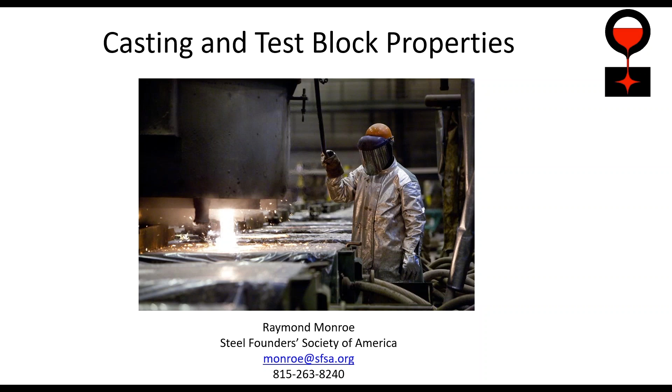Real materials have different properties in different locations, depending on their processing and on physics and everything else. So the real challenge is knowing enough about the materials and the manufacturing process to have confidence that the design you use and the material you use has the properties that you need, where you need them, when you need them. So to start out, I should clarify that we're unusual in North America because we actually require a tensile test from virtually every heat of steel.

If you order using ASTM material requirements for steel, then we're required to do a tensile test with every heat that we make. And for some reason, we've evolved now where people believe that I'm doing that tensile test to guarantee to you that you have those tensile properties everywhere in the casting. And that's fundamentally a misconception. The reason we do a tensile test is because in 1920 or 1930, every steel maker, including steel foundries, had a laboratory like the picture you see.

And to do a chemical analysis required that guy with the glasses to individually analyze each element using titration, using wet chemical methods. And in fact, he would do that for all of the required elements. And so I might not know for a week what the chemical composition of my heat was. In fact, we had melting people who were really clever, and they could tell from grinding a piece of steel and seeing the sparks that shot out of it about what carbon content it had. And we could identify how hard the steel was by using different files and different metals to see which one scratched the steel, because we just didn't have all the analytical tools that we have now.

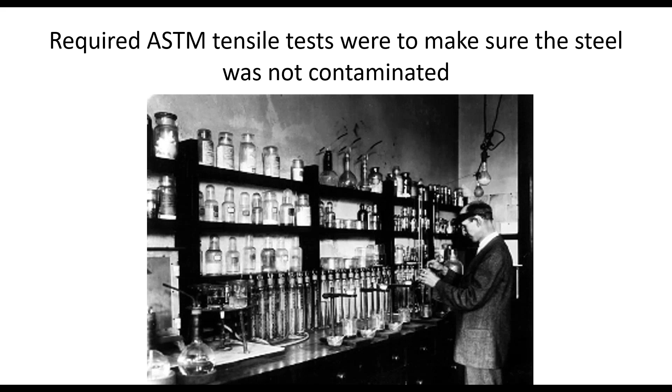And because in the 20s and 30s we didn't have the chemical analysis, how did I know that the steel that I was sending you wasn't contaminated with something like tin or lead that I wasn't analyzing for? And the way that I made sure that the steel I sold you was capable of doing what you expected was to check each heat of steel with a tensile test, because a tensile test was fast, quick, and cheap, and allowed me to demonstrate that we got the properties out of that heat of steel that I expected. And so the ASTM tensile test is a test of the steel heat, not a test of the products that I sell you. We see this even today.

ASTM A6: the A committee is the steel committee. It was the first committee formed by ASTM, in the late 1800s. The A standards are sequentially numbered, so A6 is the number 6 standard that was ever written by ASTM. That standard is the oldest still active standard, so it is still in the latest book.

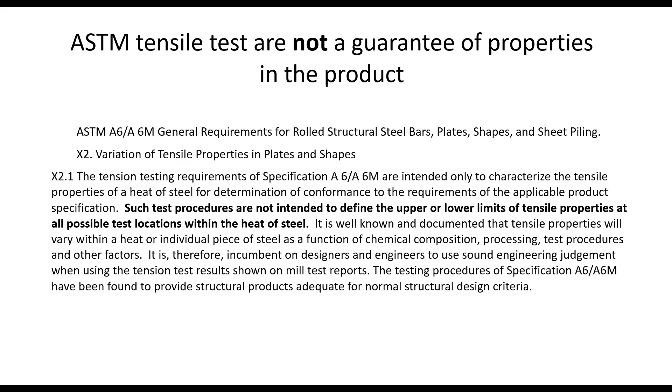And in that standard, to clarify this, there is an Appendix X2, and you can see in bold here that the test procedures for tensile testing are not intended to define the upper and lower limits of tensile properties at all possible test locations within the heat of steel. And the first sentence says it's to determine the characteristics of the heat of steel for the requirements of the specification, not to provide tensile test results that you can use guaranteed every place in the product.

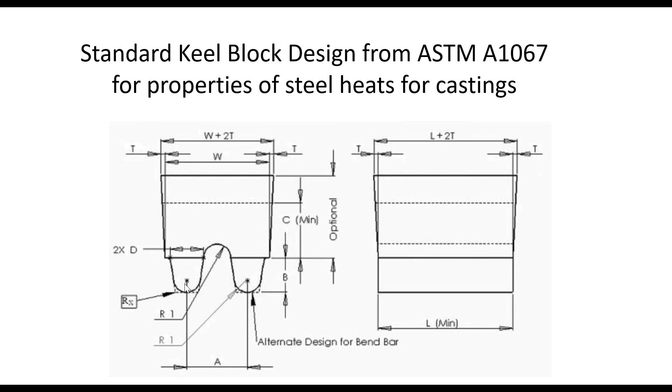Now, in steel castings, we pour a special keel block design that's designed so that it's sound. These legs are sound, and then we cut the legs off and heat treat them the way we heat treat the casting. And that is the way we demonstrate our conformance to the ASTM specification. So if you order an ASTM grade 216 WCB, this is where I take the test material from. And all of the steel casting grades are referred either to ASTM A703 for pressure containing, more critical parts, or A781 for general use. And you can see we have basically the same note in the ASTM casting standard that they do in the plate and bar standards.

The tension test requirements are intended only to characterize the tensile properties of the heat for determination of conformance to the requirements of the specification. They're not intended to tell you all the tensile properties everywhere. So if you get a casting and you cut it up and take tensile specimens out of it, some of them will be higher than the properties we report. Some of them are likely to be lower, especially if you take them from the center line where there's some segregation and porosity.

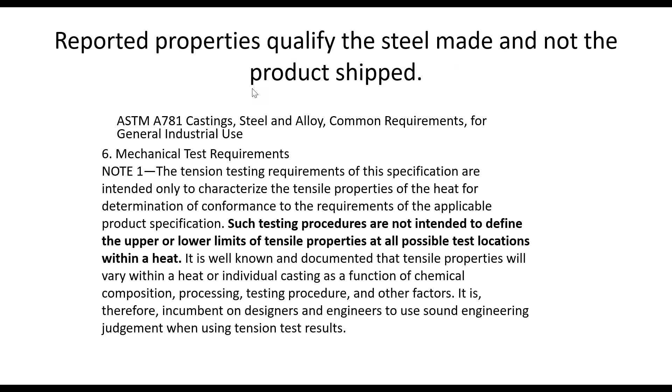And so it is incumbent on designers and engineers to use sound engineering judgment when using tension test results. And so we're qualifying the steel we made, not the casting. We're showing you that the steel we poured in that hole had the properties we expected, and so we would anticipate the properties of the product will meet your expectations. So the reported properties can be used to assure the casting has the properties expected, but that doesn't mean that you'll get those tension properties everywhere.

And so historically, we would print information in our handbook, and this note is still in the current ASTM standard. So we were talking this morning about the fact that we need to get our ASTM buddies to upgrade because we're on the 6th edition and we actually can upgrade it online. So we need to change this note, but we actually have information to give you some indication of how you deal with the difference between the reported tensile properties and what you'd expect in the casting.

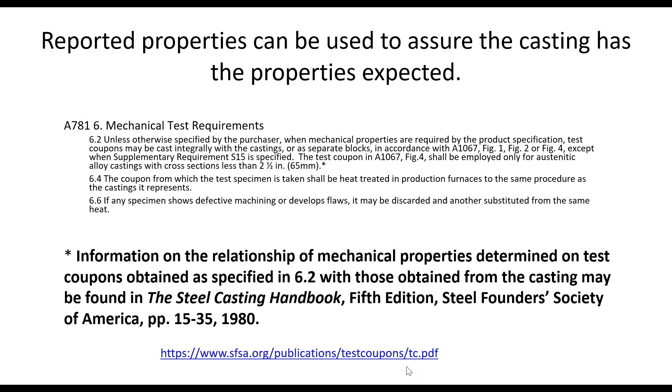We actually have on our website a whole write-up on test coupons that you might find to be useful. So this is what that section looks like, and there are a number of things that show how the section size affects the properties. So in a cast carbon steel, the yield strength is around 40 KSI, which means that, for example, in the boiler code, you use 20 KSI.

40 years ago, when I started my engineering career, I can tell you that the big producers like Caterpillar and John Deere were still breaking parts when they made a new design. They had test labs where they actually verified that the part would meet the requirements. Even today, when you're making crane hooks and crane hardware, they do proof testing to prove that the new designs and the existing products meet the requirement. And so at that time, everybody did the internal testing to show they actually had the properties.

Now we're in a model-based environment where you want to know the properties every place in the casting, and you'd like to have a single value everywhere. And unfortunately, that's not the way the world works. So if I look at an alloyed steel, in small sections, I get fairly uniform properties. But because of the thermal conductivity of the steel, I can't cool it fast enough in the center.

So for a 6-inch section for an 8600 steel, you can see that the tensile strength and the yield strength go down. But with that alloy steel, I'm still much stronger than I was with carbon steel. So in carbon steel in the center of the 6-inch section, I'm a little under 40 KSI. In 8600, I'm still over 80 KSI. So those alloyed steels still give me improved properties even when the heat treatment can't reach into the center.

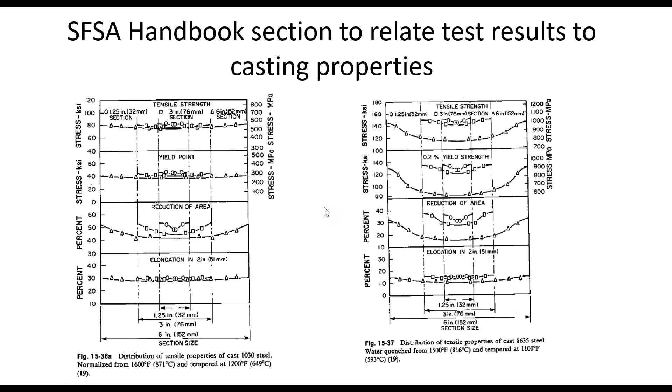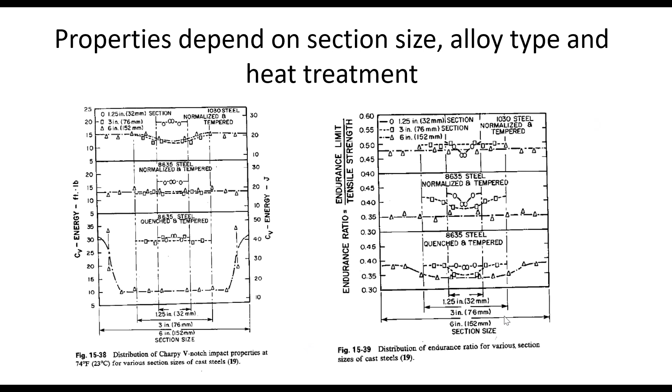And of course, today you're not only concerned with strength, but also toughness. And so we have some information about the variation of toughness with section size and fatigue properties. Now, if you are making critical castings, things for the oil field, things for the Navy, then people want larger test blocks so that you can actually directly correlate.

And so actually in ASTM A148, that is a specification that lets you order steels by properties, not alloy, and the foundry or the producer gets to decide what alloy to make. And so in this specification, it says if you're going to have a quenched and tempered steel casting and it's thicker than 3 inches, then you've got to meet the requirements with S15. S15 says you have to cast a separate test block that's big enough to emulate.

So T is the thickness. So this says when T is over 3 inches, then I have to make a test block. And that test block, if it was 3 inches, would be 9 inches by 9 inches by 3 inches thick. And I would take the test at T/4, or 1/4 of the way to the center. T/2, I'm in the center.

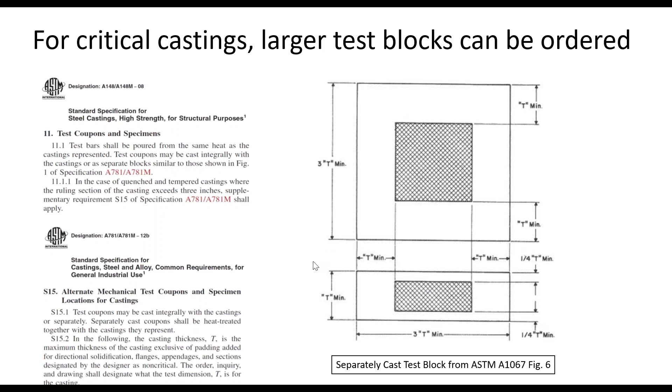The center is the last place to solidify typically, and so it has segregation and microporosity, and you don't load it normally because you have some bending moment, and so it's not particularly useful to know the properties in the center. The surface is going to have properties that look like the keel block because it cooled fast. And so T/4 is determined to be the most practical way of characterizing the properties of the casting with that section thickness. And so that's why we do a T/4 test. And we do it in a 3T by 3T by T section.

Now, when I call out S15, these test blocks are expensive. They get big fast, and they tell you what the properties are in the test block, not necessarily in the casting everywhere. And the S15 in paragraph 3.2 says when it's over 5 inches, you can just make it a 5-inch test block. So if you think about it, the A148 says if it's over 3 inches, I have to do a test block. But once it's over 5 inches, I use a 5-inch block. And that's because these things get big fast.

A 3-inch test block is 70 pounds, and I have to put risers and gates on it, so it weighs over 150 pounds. So if I have a 1,000-pound induction furnace and you want a 3-inch test block, I'm using 15% of the heat to make the test block. A 5-inch test block is 325 pounds. And so you can see right away that you're going to chew up an awful lot of steel really fast if you want a special test block.

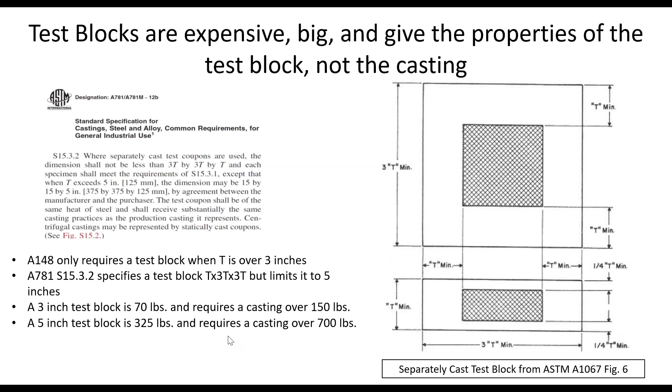But special test blocks can be really useful. So the test blocks separately do provide a real value. And the value they provide is if you make me qualify to make a separately cast test block, it means that I have the technical skills, the process disciplines, and the process capabilities to meet the properties you need in the section size of your casting. So if you ask me to make a test block, what you've proven is that I have the skill and the technology to meet the properties in a test block, and you assume, and correctly so, that that means I should have the technology to make a casting with those kinds of properties.

If you have me do a cast test block with every heat, that shows that not only can I do it one time, but that I can do it every time, so that I have the process disciplines, the skill, and the capability to make those properties in each heat. So if you have a critical casting, a separately cast test block can be a useful guarantee that you're getting the properties with every heat. And if that part fails, it gives you documentation that the part was made correctly and had the properties you anticipated. But you have to recognize that separately cast test blocks get big fast.

One of the other things that people will often do is say, I'll just add a chunk on to the casting and then I'll cut it off and get the tensile test from that chunk. And that can be a good and useful technique. But if you do this, and I'm worried about this section here, then what I'm really doing is I'm making a test block that shows me what the properties would have been here if I had not put the test block on. But putting the test block on means I'm going to have poor material out in this area right where I want good material. So generally, adding a block on needs to be done carefully, or you compromise the material in the casting where the test block is attached.

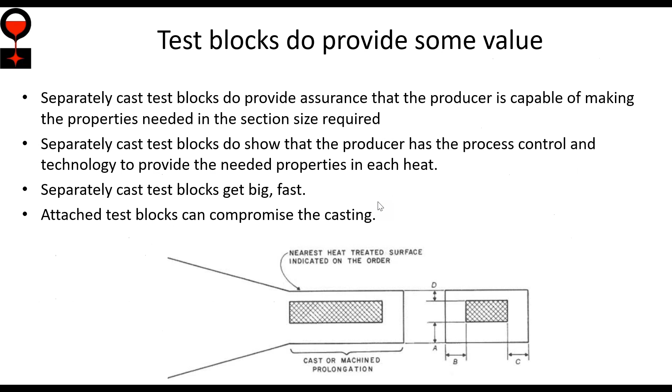So just in summary, if we look at casting properties versus test blocks, the mechanical tests and analysis are for the acceptance of the thing. They're done by the producer. They're not done by you. The mechanical properties taken from the castings can be used by me, the producer, to qualify the part, but you can't use them to reject the part. So if I don't have enough test material and I cut a chunk off your casting and weld material back on, I can use that on an expensive big casting to show that I met your properties. But if you take that same casting and cut it up and say that the properties are not in the casting, you cannot reject the part with those properties.

Now, if you want to, you can always put anything in your purchase order you want, and you can tell me you're going to do that. And if I accept the order, then you have every right to require that when you cut the casting up in a certain location, you get the test properties. But that's a special requirement. That's not a normal ASTM requirement.

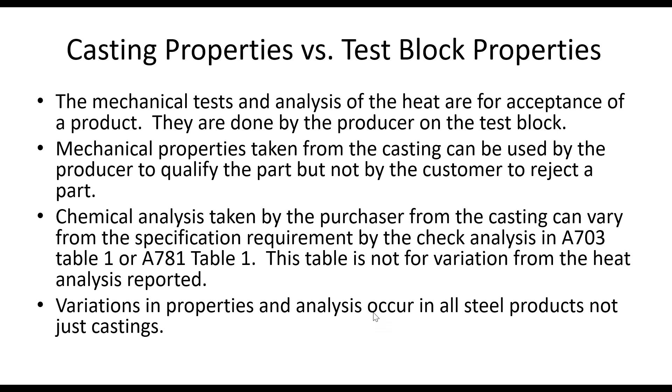In the same way, if you do a chemical analysis, in ASTM, it gives a table in A703 and A781 that says that the specification becomes wider. So the check analysis is not to see that you get close to the heat analysis I report. The check analysis makes the specification wider so that my casting is still in spec, even if it doesn't meet the specification of the grade, as long as it meets the specification widened by the check analysis in Table 1. So this table is not for the variation from the heat analysis, it's for the variation from the specification itself. And what you should recognize is variation in properties and analysis occur in all steel products, not just castings. So with that, I think we're done.

We've agonized over this. I remember talking to one of my colleagues that works for a large OEM, and he thought I ought to guarantee the properties in every casting. And I can tell you, we would be delighted to do that. That just means I have to saw up every casting and test it, which means you never get a product that you can actually use in service. But I can make products and test them and show that every product I made would have performed if you had used it. And so we really have to use our engineering skills and our confidence that our engineering skills and material understanding is good enough that our products will meet our performance expectations.